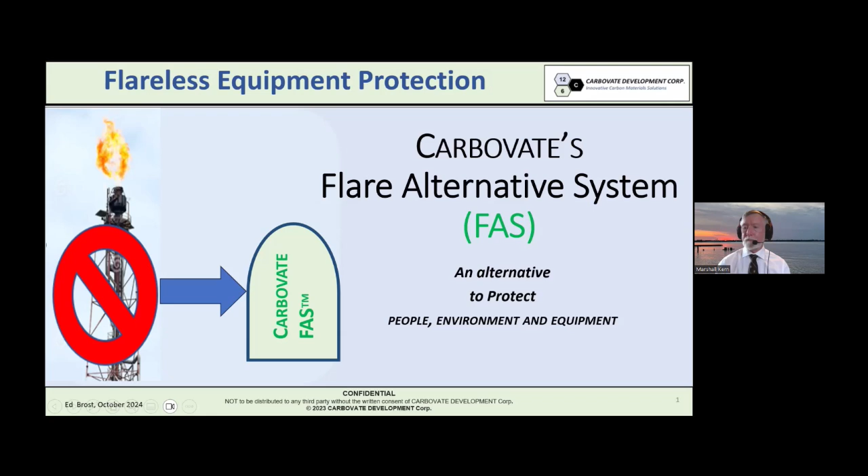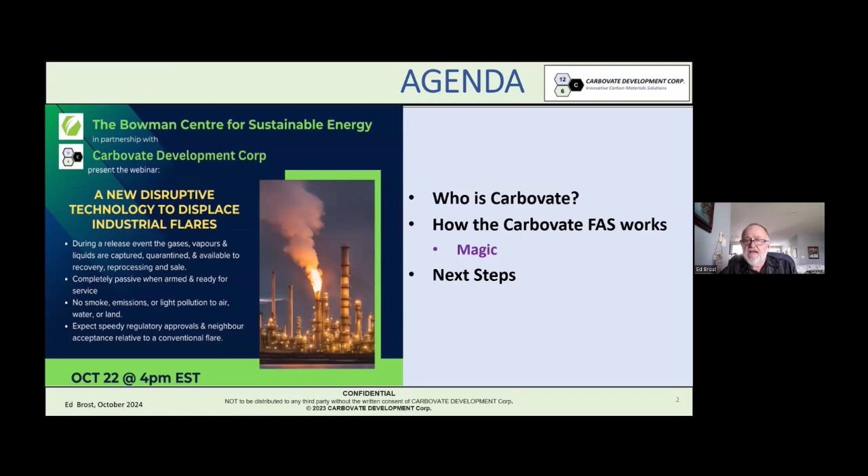So this afternoon, we're going to talk about what we call the Carbovate Flare Alternative System, or FAS. We were granted 3 patents on this earlier this year, which frees us up now to talk about how this system works. The system incorporates what might appear to be magic, so we're going to talk a little bit about magic today, and about our plans or strategy for commercializing this innovation.

But before that, I would like to introduce our audience to Carbovate. Carbovate Development Corporation was founded in 2018. We're a Sarnia-based company, with associates in Toronto, Quebec, and British Columbia. And like most corporations, we have a nice flowery mission statement, but it boils down to this.

What it really means is, what can you do with bitumen besides burn it? I'm referring here to Alberta oil sand, or Western Canadian oil sands bitumen. Most bitumen today that's produced or extracted is converted into fuel, and we burn it. The world's changing though, and as the world changes, we're looking for ways we could use this bitumen as a really valuable resource in ways that don't involve combustion. In other words, bitumen beyond combustion. To that end, Carbovate has been involved in carbon fiber research for the last couple of years, but we're also working on an even sexier product than carbon fiber, and that's asphalt.

As it turns out, asphalt or bitumen is, depending on the lease or the source, somewhere between 60 and up to as high as close to 80% asphalt. Now, today, that asphalt is primarily converted into fuel and burned, but this asphalt is actually some of the best asphalt in the world. And in trying to come up with a way to extract asphalt cheaper than it is today, we developed an entirely new process to extract asphalt from bitumen, and we were granted a patent for that process.

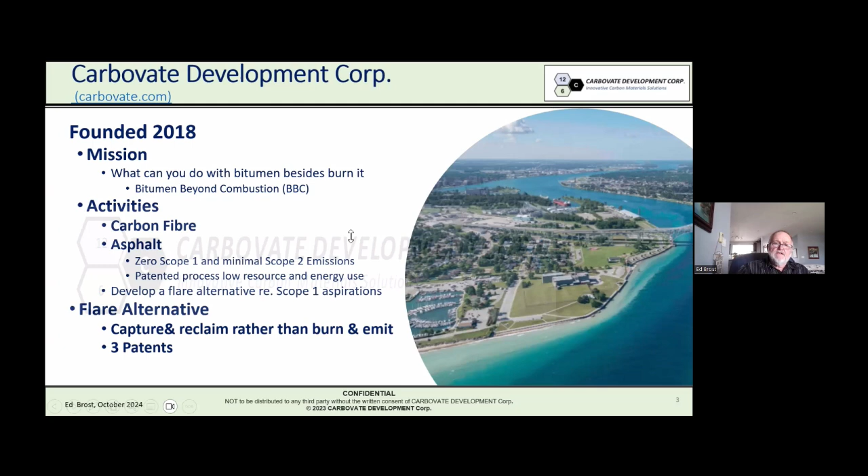And so we spent a lot of time, effort, and money developing a process that eliminates the need for a flare for our process. What the flare does in the event of emergency or maintenance, the process will capture and reclaim rather than burn and emit the material. So that's a bit of background about Carbovate and why it is we're before you today talking about an alternative to a flare.

Now, before we go much further, we need to be crystal clear. This is not a solution to all processes that need a flare for protection or safety. This process that I'm going to describe to you today is well suited for processes handling fluids with boiling points above, say, ambient temperature. And that includes solvents, gasoline, chemicals like benzene, toluene, xylene, alcohols, and so on. For that type of material, this system should work very, very well.

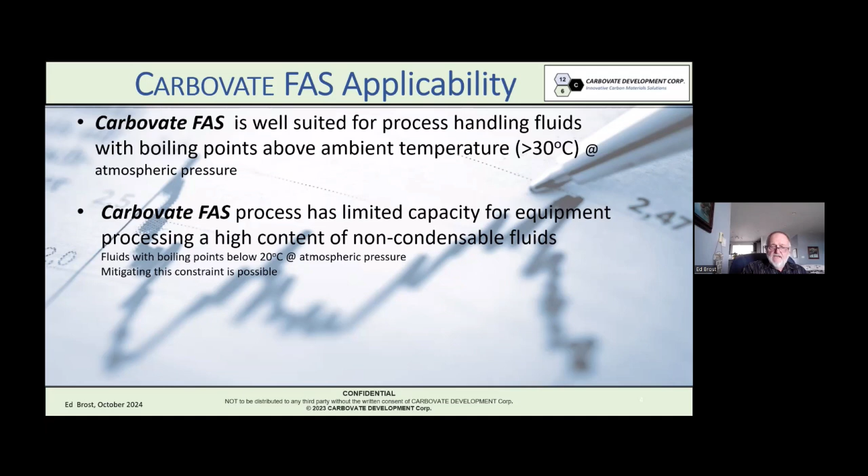It's not compatible, or wouldn't work very well at all, with processes that have a high inventory of gases, or what we call non-condensables. So materials that have boiling points, say, below 20 degrees C, which would include liquefied petroleum gas, propane, that sort of thing. Having said that, this process could work regardless of the inventory in the plant when it's operating, and could be used for maintenance or support services, even though the process might normally be processing a lot of hydrogen or methane or whatever.

So we'll talk a little bit more about this maintenance application later today.

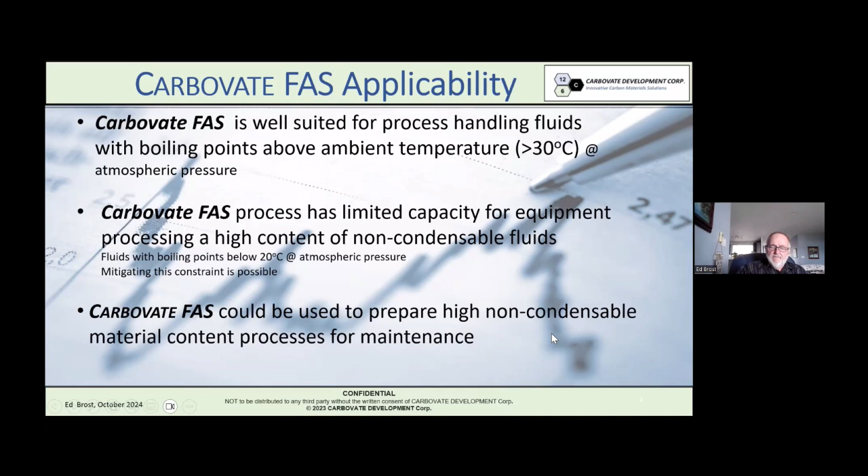So we are standing before you, talking about some claims about a flare alternative system. I want to highlight again that it's patented and could be a substitute for certain processes. It is completely passive—once it's in operation or in service, it requires nothing to operate. Pardon the double negative, it almost can't not work.

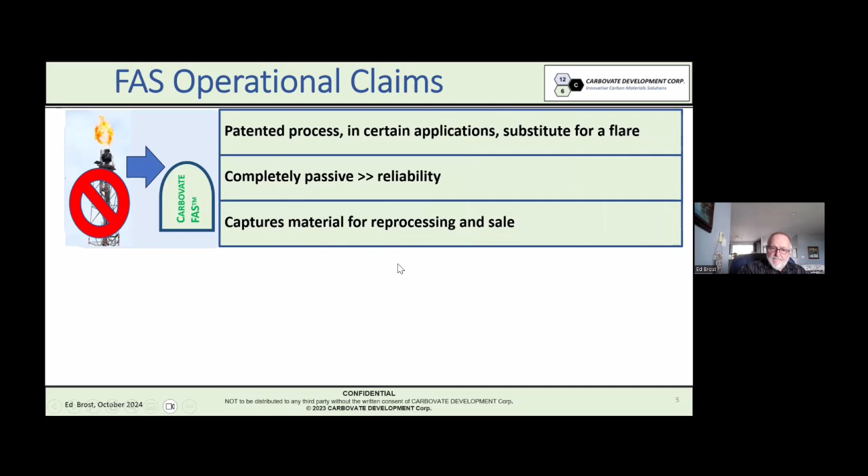As I said at the outset, it captures material for reprocessing and sale. The containment vessel is reduced—you might think you're going to need something the size of a hockey rink, but it won't, because of the chemical properties of the operating fluids, which I'm going to discuss in detail. This process, this Carbovate FAS, is really suitable for protecting a single process unit or perhaps several process units in a large facility, not likely for the entire facility.

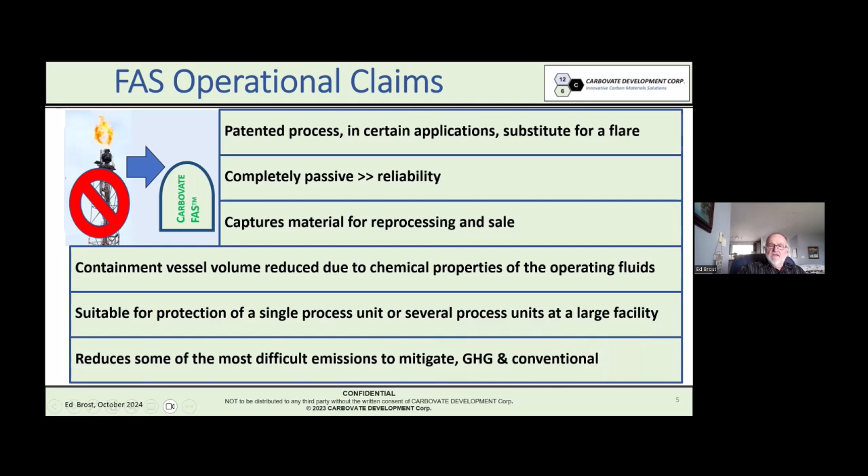And if your company is interested in managing GHGs, this is a solution for certain processes to mitigate GHG and conventional air pollutant emissions associated with a flare.

So with that, we are talking about substituting an inherently, critically important safety device called the flare. This is an extraordinary claim. And like Carl Sagan said, extraordinary claims require extraordinary evidence. And so...

Towards some of that evidence, we have hired a couple of independent engineering companies to build simulations for us. These companies are independent—they're not even in the same country. They have developed the simulations, and the simulations work. It shows that the thermodynamics, heat material balance, all of that—this actually works according to the models.

To that end, we were granted, as I mentioned earlier, three patents describing how this process works. We are working with the Patent Cooperation Treaty, PCT, and the PCT has taken an initial look at our claims and validated all of them. They say, first of all, they're credible. Nobody else is doing this. They are unique, and they told us that in their view, this idea has commercial application.

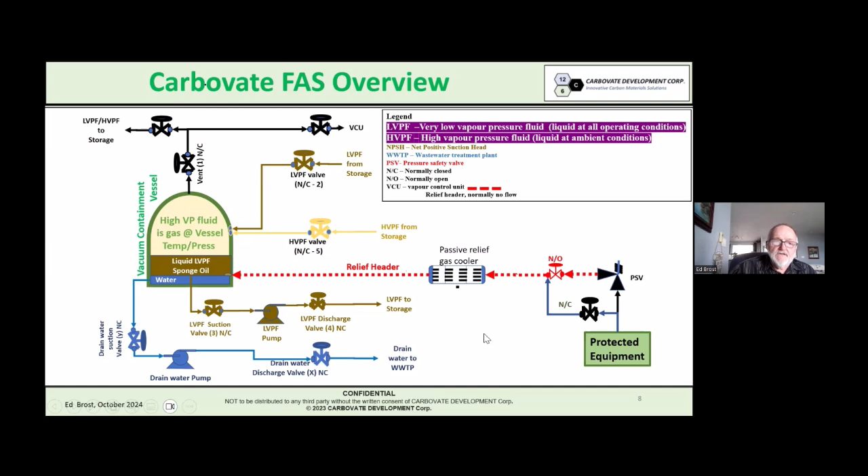We're going to simplify it and get down to how do we start it up. Here we have our brand new vessel delivered to your site on a truck. Of course, the vessel is steel and it's full of air. So what are we going to do about that? We don't want any air in our system. We're going to start and open some valves.

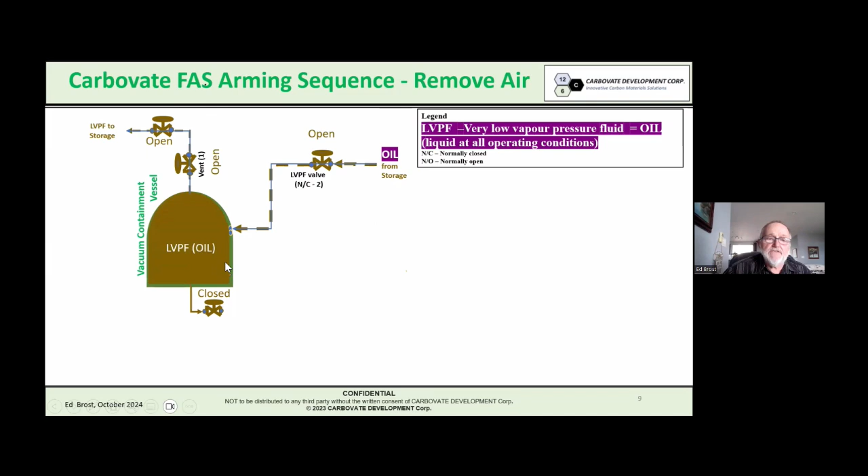And move some oil into the vessel, displacing all the air. So now we have a vessel with no air in it, and the excess oil has gone back to storage.

So now we want to create a vacuum. Now we could have used a vacuum pump and sucked the air out of the vessel, but it won't be a perfect vacuum, not like what we're going to have here. So instead of a vacuum pump, we're going to create our vacuum by using an oil pump, which is much more efficient than a compressor anyway.

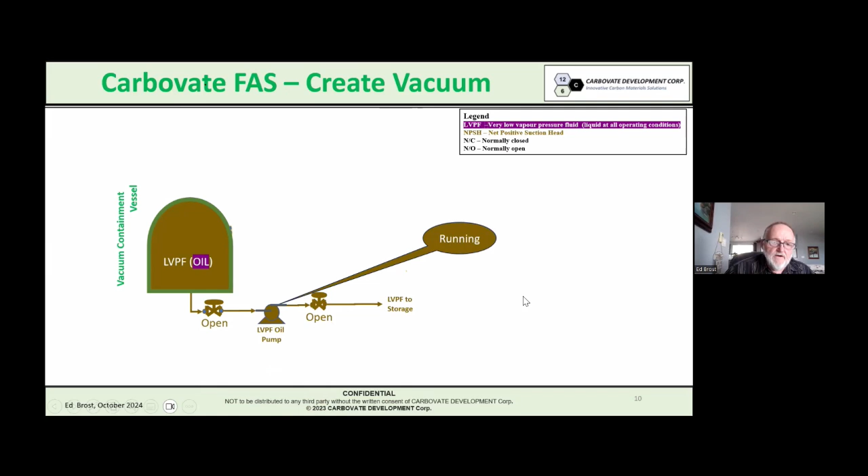And we start running our pump, but our pump's not going to run for very long. Why? Because this material has no vapor pressure to speak of. So we're going to end up with a bubble in the top of the vessel that is occupied by oil vapor, and it's going to be under a very deep vacuum. It's going to be equal to the vapor pressure of the oil at the temperature and pressure, which is ambient inside this vessel. That's good news so far because we have a deep vacuum.

And remember, in our busy cartoon, we had the protected equipment over here. So if something happened, the good news is it's going to flow very rapidly over here. The bad news is the bubble is so small, the vapor space is so tiny, it doesn't have much capacity to collect and capture relieved material. So what are we going to do about that?

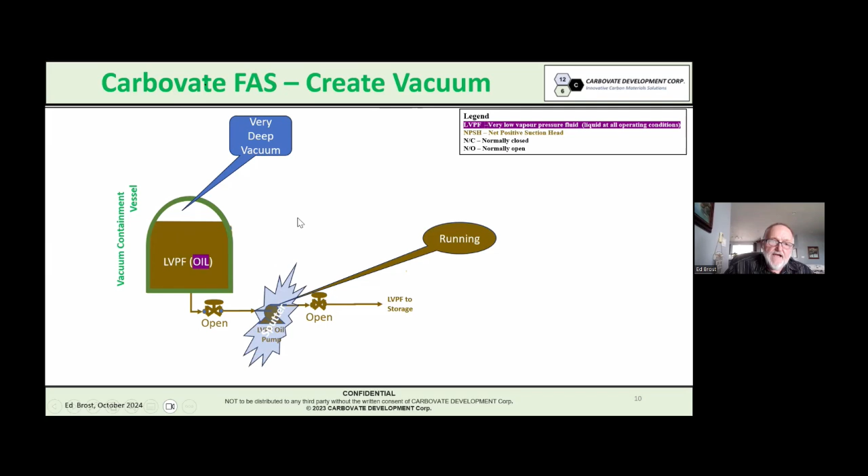Our pump, in fact, will stop running, it'll sputter, it'll cavitate. So what are we going to do? We're going to inject our naphtha, our high vapor pressure fluid, into this same space.

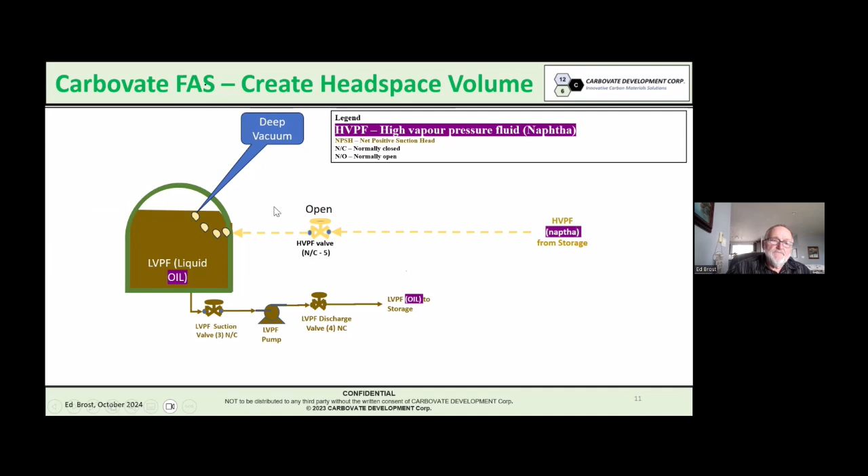So we open our valve, the naphtha flows in, but guess what? Under the conditions in here, this material is way above its boiling point at 20 degrees C. So it immediately flashes into a gas and evaporates. And that means it increases the pressure a little bit, allowing our pump to start again.

So now we can pull more oil out and add more naphtha. And while this is happening, the pressure is staying under vacuum. It's still staying under vacuum.

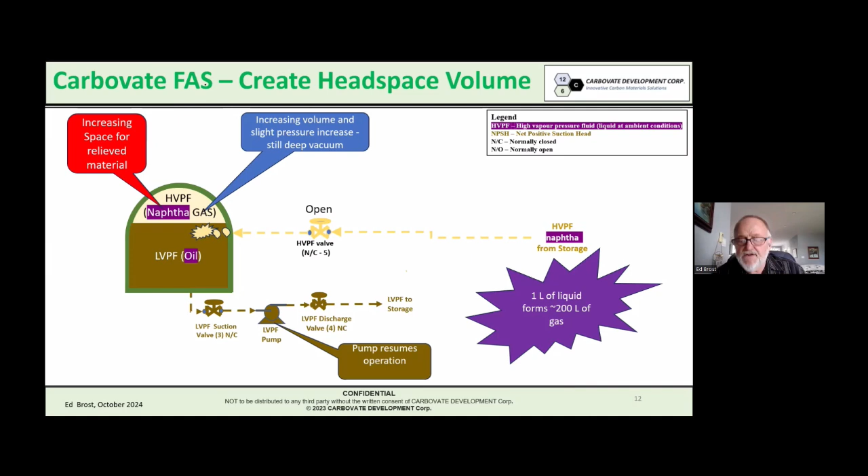Now, there's one last physical property of these fluids we all need to be clear on. When you evaporate a liquid into a vapor, the vapor occupies far more space than does the liquid it came from. In the case of light hydrocarbons, like we're talking about, notionally, 1 liter of liquid will form about 200 liters of gas vapor. The exact volume depends on a bunch of variables like temperature and pressure and other factors, but notionally, it's far more volume involved. In the case of my discussion here, saying 200 liters of gas will come from 1 liter of liquid.

So when we get to the armed state or ready state, we'll have our vessel full of naphtha vapor, a tiny infinitesimal amount of oil vapor in here because it doesn't have any vapor pressure. The system is under a vacuum, and we now have physically an apparent volume that's much more significant in the context of being able to collect relieved material. So far, so good.

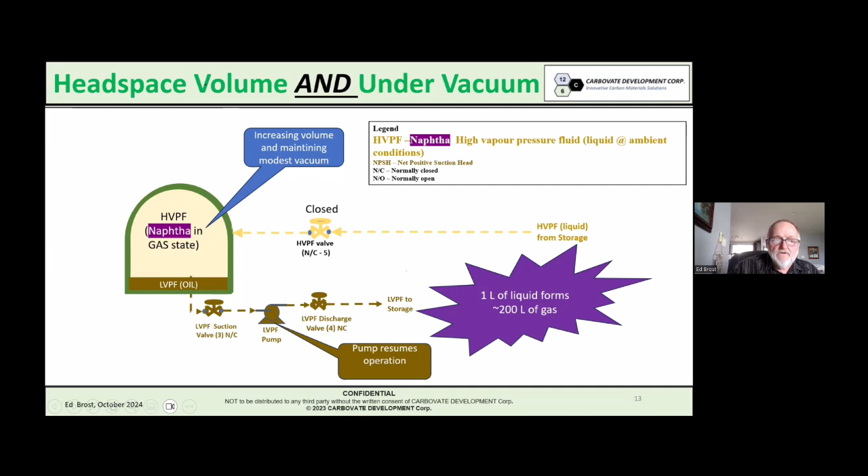So back to our busy cartoon. We have our protected equipment. We have our vessel here with the naphtha and oil in it, and that is called, we refer to that as the armed state. The system can now be disconnected from all of these connections because it doesn't need anything else now to operate.

And this is where something that might appear like magic happens, because as Arthur C. Clarke said, any sufficiently advanced technology is indistinguishable from magic. And you might have noticed that some of the color cartoons and highlighting were in purple. That's the magic part.

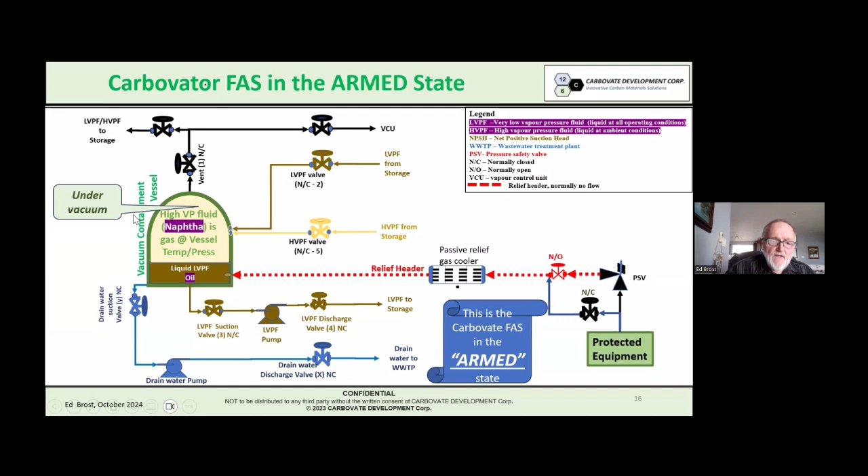So here we are. We're under vacuum. Let's focus in on this part of the system now and get rid of all the other lines. And what we have is our protected equipment. We have our vacuum vessel or our containment vessel in the armed state. And we have a pressure or relief header analogous to a flare.

Now, normally in a conventional system, this relief valve would be connected to your flare. Here, it's connected to the containment vessel instead. The pressure safety valve, if it is here, and if the pressure in our vessel, for whatever reason, exceeds a target number, the valve will open and go either to flare or in this case to our containment vessel.

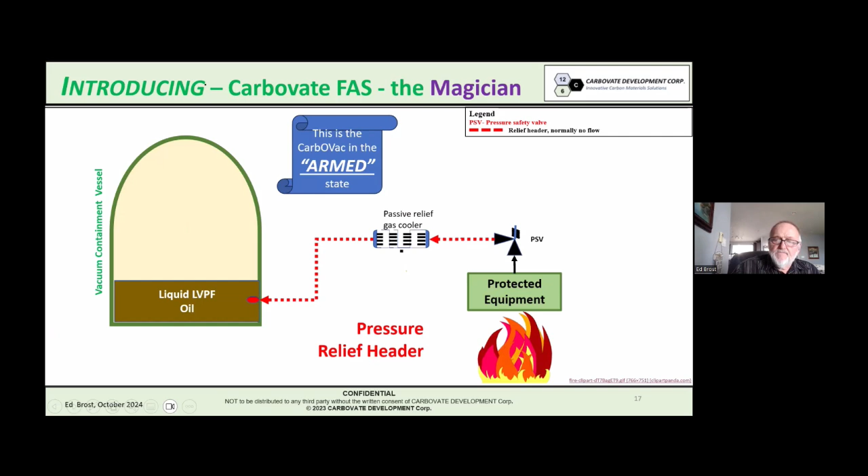So we have some kind of an event happened. The pressure starts to increase. It gets to an unacceptable level. The relief valve opens. The overpressure material then flows toward an optional cooler.

It's not necessary, depending on the process. We may or may not need that, but this is a passive cooler in that it is just a bunch of tubes with fins on it. So it's an aerial cooler, but with no fan or anything like that.

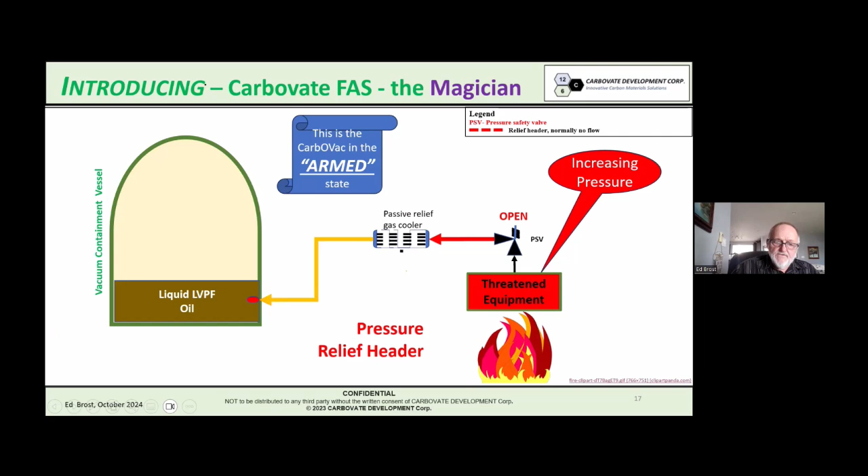The cool material then flows in here, and this is where the magic happens. Remember, I said 200 liters of gas forms 1 liter of liquid. Well, as this material goes in here, guess what happens?

The pressure starts to rise. This was at equilibrium before the valve opened. And so what's going to happen is some of this naphtha is going to start to condense.

And as that happens, for every liter of naphtha that condenses, it frees up 200 additional liters of space to accept material from our threatened equipment.

And so if you can envision this, before the relief valve opens, everything's in equilibrium, it's nice clear blue sky, or whatever color, yellow sky inside the vessel. Once this opens up, it'll get very foggy, and then suddenly it'll start raining naphtha inside the vessel.

And so although the vessel is steel, it's not a balloon, the tendency here is for not only the volume, but also the pressure to be sustained. The volume will go up, especially because the liquid's rising, and the pressure will also rise slightly, but there is a very strong tendency for the pressure and the volume to be retained, even though there's more material flowing in here.

So we have more kilograms in here, but like magic, everything seems to be staying the way it was prior to the event.

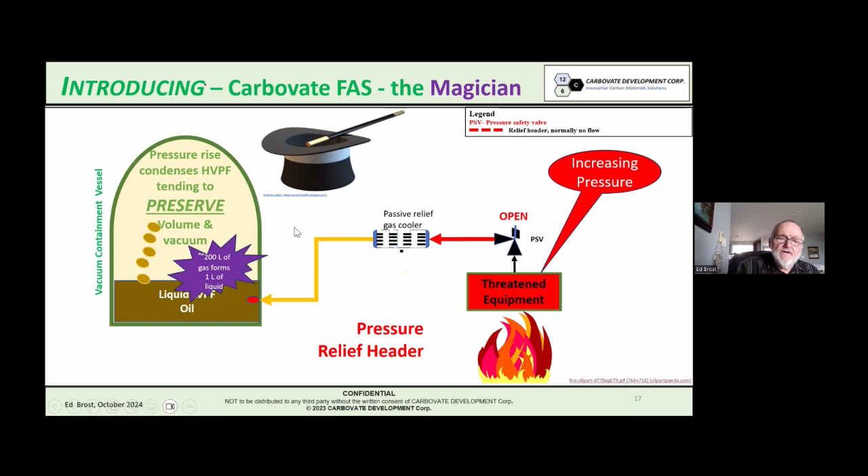So now the event is over. The pressure has been restored. The fire is out, or whatever was causing the disturbance. The relief valve closed, flow was suspended, and here we have nothing went to a flare.

Nothing was released. Everything is now contained inside our vessel. It's sequestered, and so we are now going to recover that material.

This gets really easy because we're going to do the same thing we did when we commissioned it in the first place. All we're going to do is open our valve here and send oil into the vessel and fill it up, displacing everything that was in the vessel, including all the material that was captured from our threatened equipment. And it can go back to storage and eventually for reprocessing and sale.

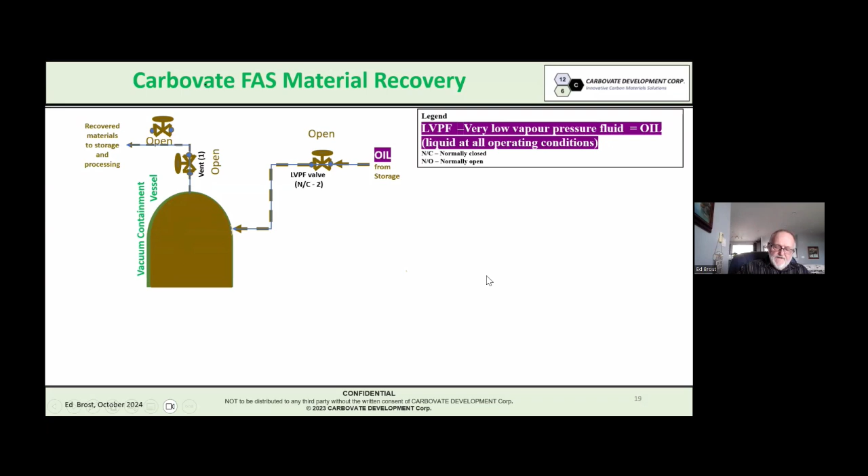So what I've described for you is referred to as a passive self-regulating process. This thing doesn't need any electricity to operate once it's armed and in service in its role as guarding this equipment, the protected equipment.

It doesn't need electricity. It doesn't need steam. It doesn't need fuel. It doesn't need anything. It doesn't even need an operator. This thing, all that has to happen is this relief valve. If the pressure gets high, all it has to do is open. Everything else is automatic. And so it is completely passive in its operation.

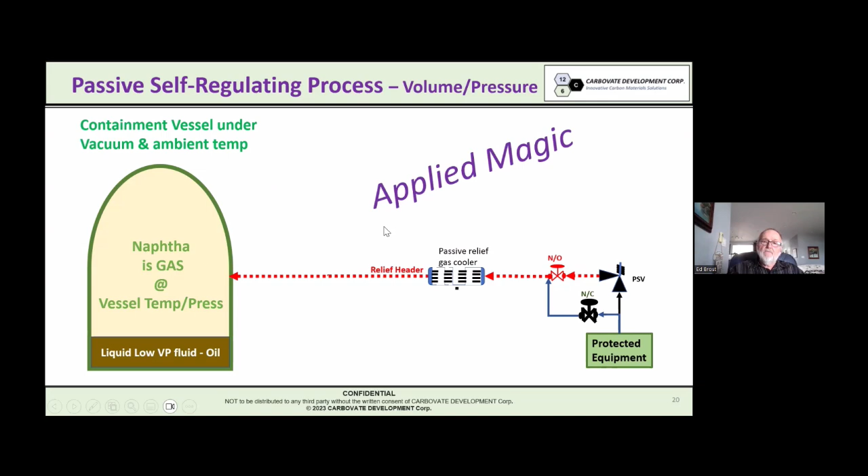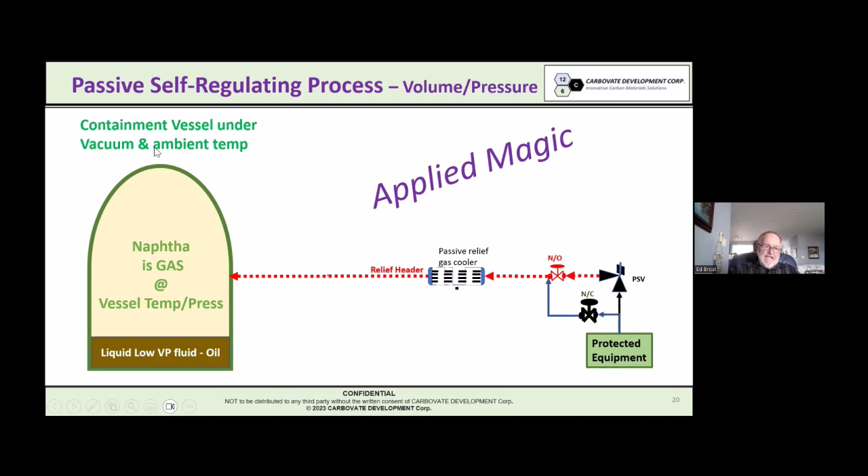And so this applied magic, we went to a lot of trouble around this to figure out how this could all work. And there's a reason for that. You could have a system like this without the applied magic, but the vessel will be huge. The purpose of this combination of fluids is to reduce the physical size of this vessel. It doesn't need to be very big at all compared to a vessel that was just depending on its physical, mechanical volume as defined by the vessel itself.

One other thing we've done towards getting across this valley of death is we've had an external engineering company physically design a plant, of FAS to support our asphalt plant. And so what we have is process flow diagrams, P&IDs for the entire facility, the sizes of the vessels, the supply and control P&IDs, auxiliary equipment, it's all there, giving us an opportunity to get a capital cost for this thing. So we also have, in the interest of commercialization, some notion of what a system like this would cost.

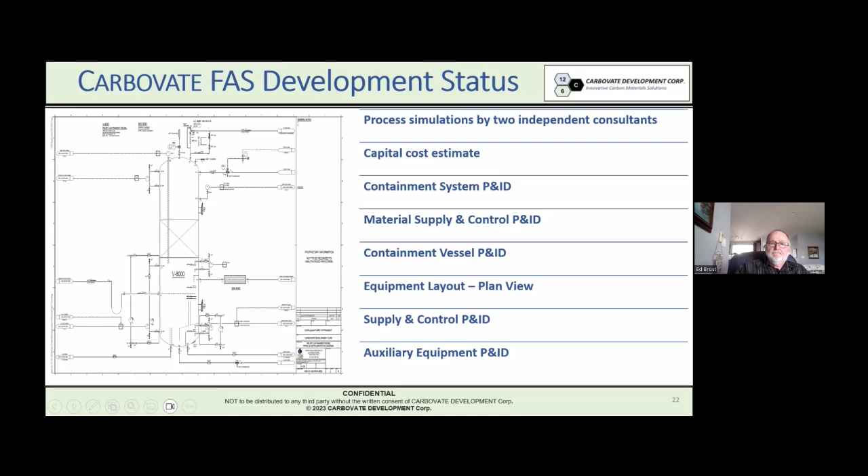Now, this is a very difficult technology to try to demonstrate because of the role a flare plays in a plant. It is primarily and fundamentally a safety device, there to protect against overpressure circumstances, and you shouldn't put a prototype in that kind of service without a flare until it's proven physically. And so that is what we're trying to do, trying to get across this Valley of Death.

Now, we have a strategy to try to de-risk this physical demonstration of the technology, and that is around planned maintenance. Because although a flare's primary objective involves safety, flares are also used as part of planned maintenance. Under completely controlled conditions, material is relieved to a flare, and we think that would be one of the first steps, actually the second step, in getting across the Valley of Death.

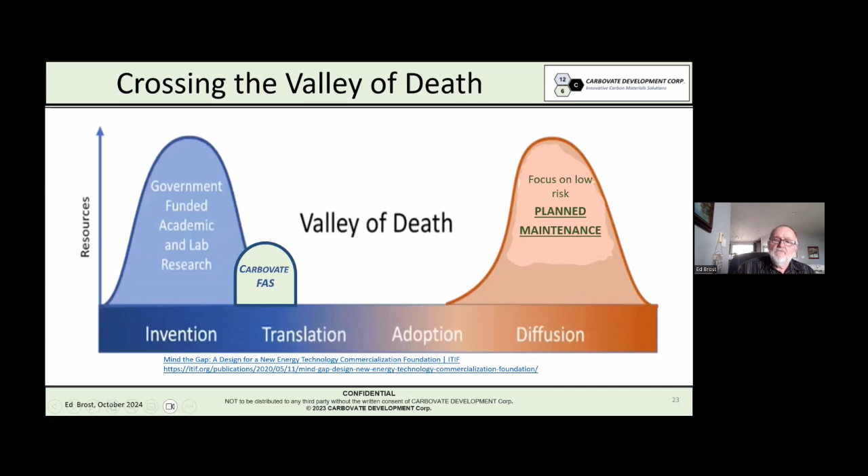So how would that look? Well, in any ordinary petrochemical facility being shut down so people can go into the vessels and inspect them and do maintenance repairs, the first thing to do is get all of the hazardous material out of the vessel. That's done using blowers, pumps, compressors, whatever, to evacuate or de-inventory the equipment. That method only can go so far. There will still be residual vapors and gases and pockets of material or sludge inside the vessel, and it's not safe to open.

So the practice is, as I showed in an earlier slide, there is a bypass around this relief valve. With the valve closed, you can open this bypass valve. Normally this would go to a flare—you'd steam the equipment out to a flare until the safety department says it's safe to open. In this case, what we're going to do is put steam in it exactly the same way, with no undue risk, and it goes through our bypass, through our cooler.

Into our vessel. Now, water is a high vapor pressure fluid compared to the oil, so the water is going to behave in there just like the naphtha does. As the water flows in and the pressure starts to rise, it'll begin raining naphtha inside the vessel, just as it would in an emergency scenario. But also, this water is going to condense, sustaining the temperature and pressure in the vessel. You can do that until the equipment is determined by the safety department to be safe to open and enter. So that's how you could use this equipment in a maintenance support role.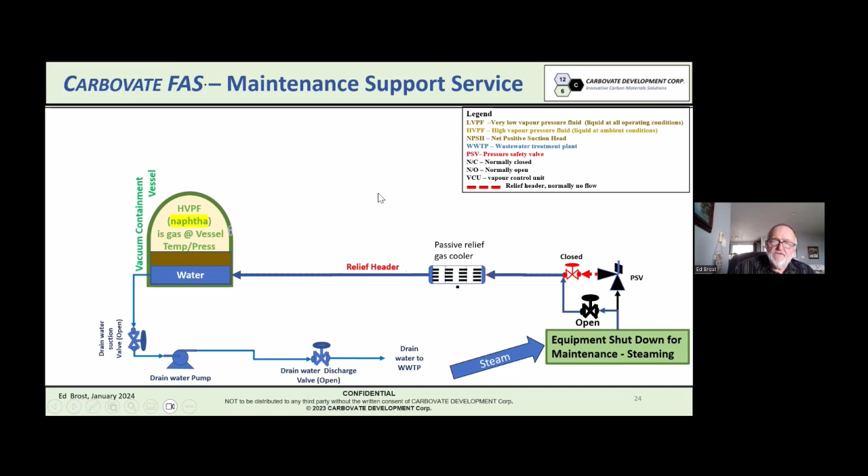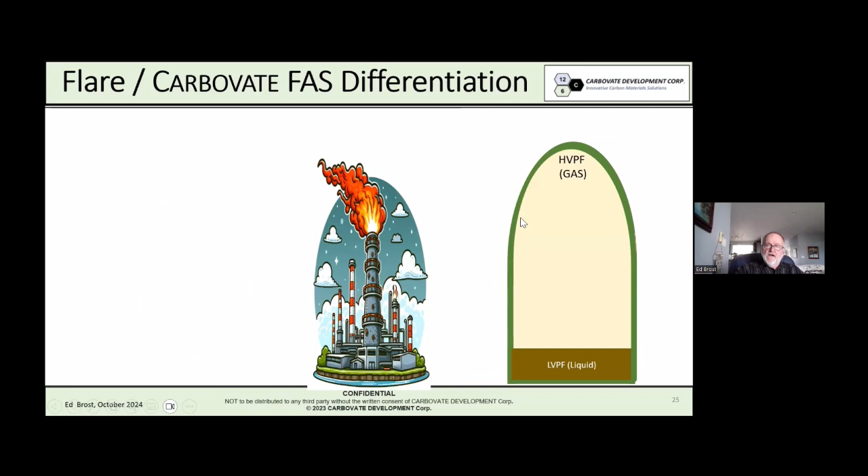Before we go further, I've been talking a lot about flares and the difference between them. So I'd like to differentiate on one page what we're talking about in terms of advantages and disadvantages. If you're interested in GHG emissions, the flare, which was a complete obstacle for us until we came up with this idea around getting to scope 0, scope 1, or scope facility emissions for our plant—the flare, especially if it has a pilot, is going to have GHG emissions chronically all the time.

That's not the case here. In the case of an emergency relief, or even a planned maintenance release, again, more CO2 on top of the chronic—this is an acute event. That doesn't apply here. Flares are not a particularly good combustion source.

They're not really good at it. A furnace is much better at burning the fuel than a flare is. So you end up sometimes with smoke. You end up with SO2, NOx, particulates, VOCs, all kinds of other things coming out of this flare. Again, not an issue with our system here.

Flares, unlike this system which is very simple, look like a simple candle, a big monstrous candlestick, but in fact, to make them reliable—and they are very reliable—there is a lot of equipment involved in maintaining that reliability: pilot flames, igniters, monitoring equipment, a flame front generator if the igniter doesn't work. None of that is required for this.

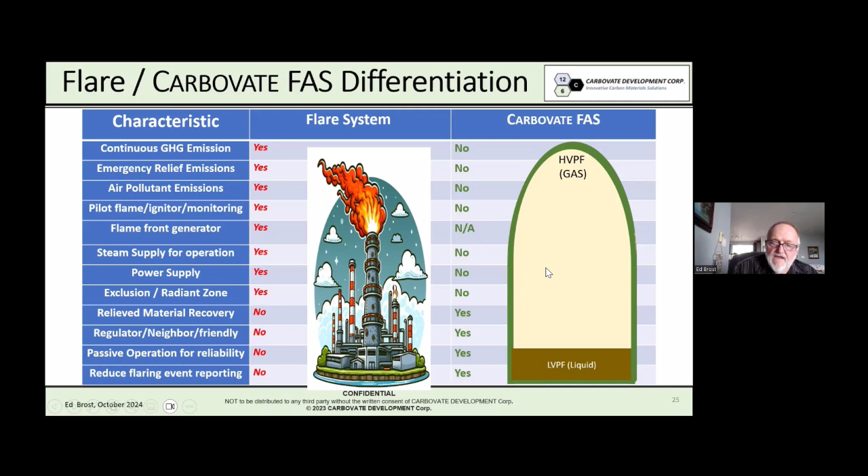There are also applications in the chemicals and beverages sectors—in beverages, this will work perfectly in a distillery. Water could be one of the fluids, as well as ethanol, and alcohol plants like methanol, ethanol, and propanol. There's all kinds of industries in the chemical sector this technology could serve.

One of our consultants has connections to the pharmaceutical industry, and he's told us he thinks there are a lot of applications in the pharmaceutical sector for this type of work. If you ask me about pharmaceuticals, I'll just tell you our consultant said so, because I really don't know—I can't make any more comments on that one.

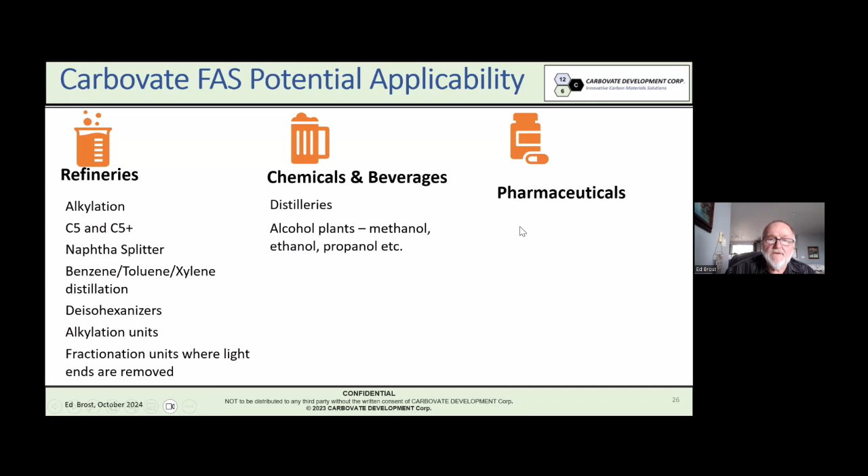So in summary, Carbovate is offering an alternative to a flare system. If you're concerned about GHG emissions, this could represent a path to mitigate one of the more challenging GHG emissions in facilities served by a flare. If you're in a facility where the flare is limiting expansion or a new process unit, and the economics include debottlenecking or building a new flare, this offers a way around that.

Even if the grand idea involves gases or non-condensables, what you could do is apply the Carbovate FAS to some other facility in the plant where it is suitable, which would free up capacity on your flare system.

Because there are no emissions, no noise, no light, none of that, we think this technology would be seen by stakeholders in the community as a friendly approach. And if that turned out to be true, there's potential for fast-tracked regulatory approvals.

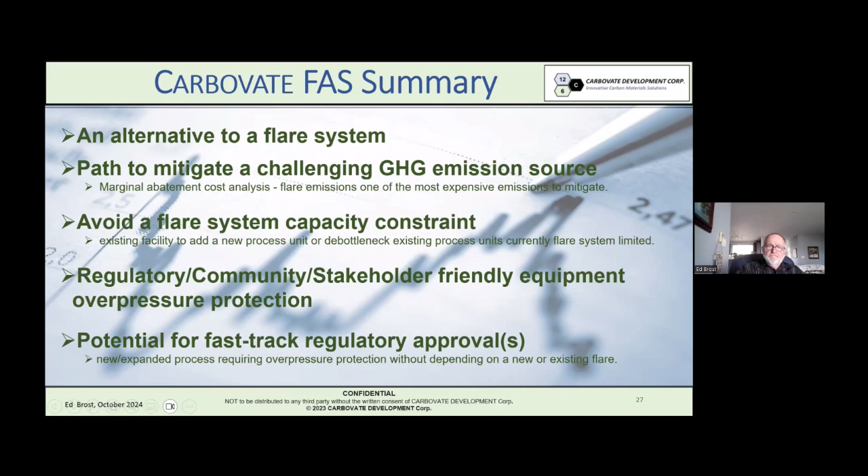So, next steps: we are looking to partner with others to build a lab or pilot scale unit to demonstrate the concept in a tangible way. It's already been demonstrated with models, but not yet physically. We have reasonably good plans on how that lab test would work and what it would look like.

Once that's proven to work, the next step would be to build a commercial demonstration unit. I think it would probably be sized to fit on a trailer, maybe two trailers or a truck—think of a vacuum truck.

Then you could go to a whole variety of different industries and try it out as part of their maintenance operations and shutdown operations. Doing that, we would test a variety of potential applications without presenting any undue risk to anybody.

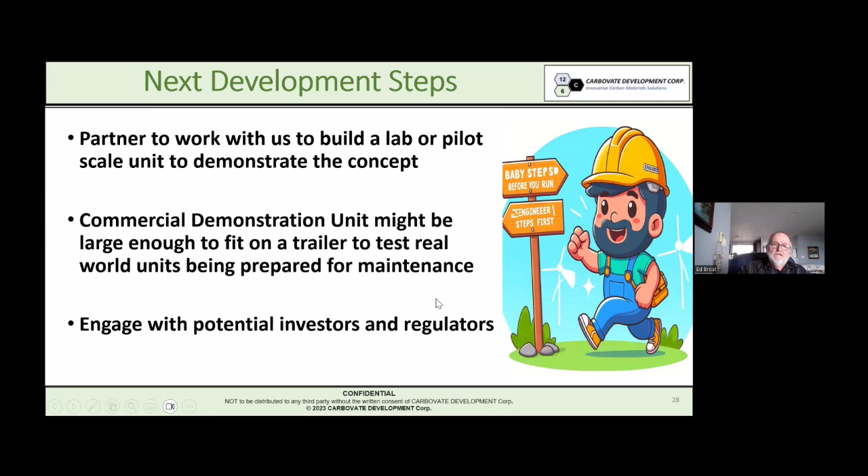To that end, we are engaging with potential investors and regulators to help us with our journey across the valley of death. The type of people we're looking for are likely multinational corporations with connections to the oil and gas and petrochemical sectors. So with that, I'd be glad to entertain some questions.

Am I talking? Hello? Hello? Ah, there you are, hi Marilyn. Dawn, can you unmute Marilyn? Dawn Greaves.

I'm never surprised when they don't want to unmute the politicians, but excellent presentation, super interesting idea.

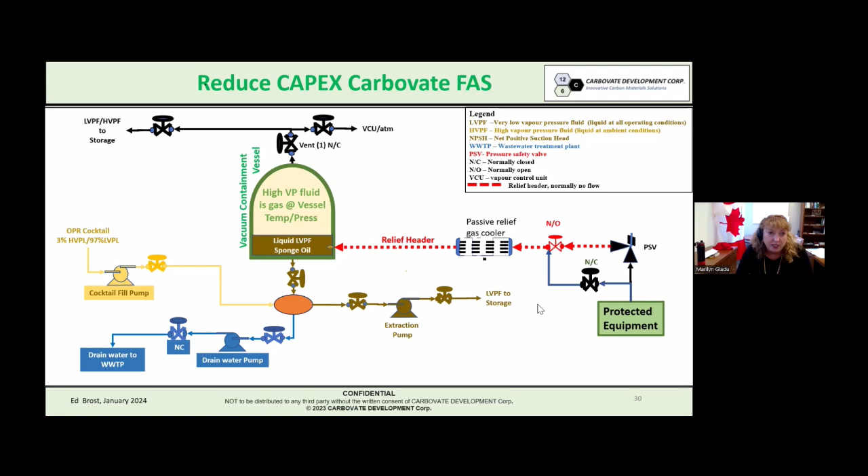One of the challenges I see is that flare events have a huge range—sometimes it's a little, sometimes it's a whole lot more than you think. You've got a small vessel for economic cost. How are you taking care of valve sizing in and out to ensure that in a super rapid event, you can bring all the gas in and let the oil out while still being responsive in a smaller event?

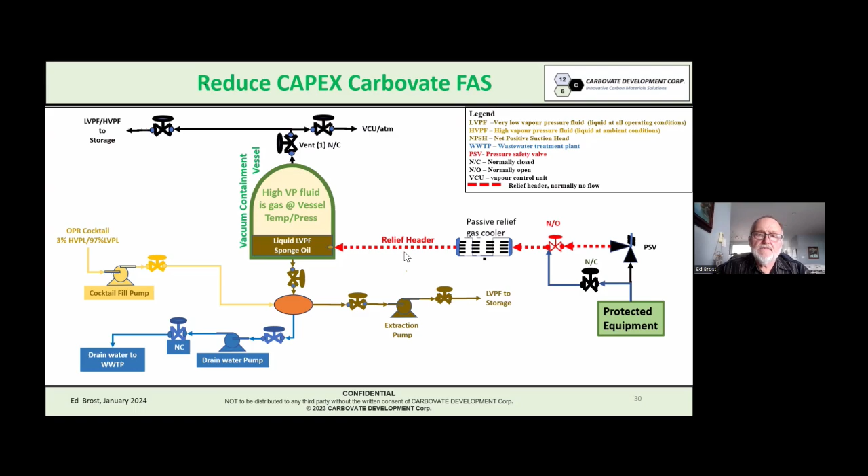That's a really good question, Marilyn. At the outset, I mentioned that this would be suitable for a single unit. So we don't think you would take a whole refinery and try to bulldoze the flare and replace it with a vessel like this. No, what you would do is bolt it to the BTX splitter or fractionator, so it'd be connected to one unit.

Your question, I think, also included how do you come up with the line sizing over to the vessel? Well, that would be the same as you do with a flare. You're going to have a header, and a smart mechanical engineer with fluid mechanics expertise—excludes me, but I think would not have any problem with that—because we have quite a pressure differential here. The vessel is under vacuum, whereas a flare header might be operating at 10 psi or something, marginally above atmospheric pressure to ensure you don't get air in it. Here we have more motive force because we have it under vacuum.

So I don't know if that answers your question. I think though, thank you. A key point though is we're not thinking that at this point this thing is ready, or likely ever be appropriate, to take down the whole flare. It's going to be for one unit. Now in a refinery, you might have an alkyl unit, a deisohexanizer, and a BTX distillation column—that would be three of them, one in each unit.

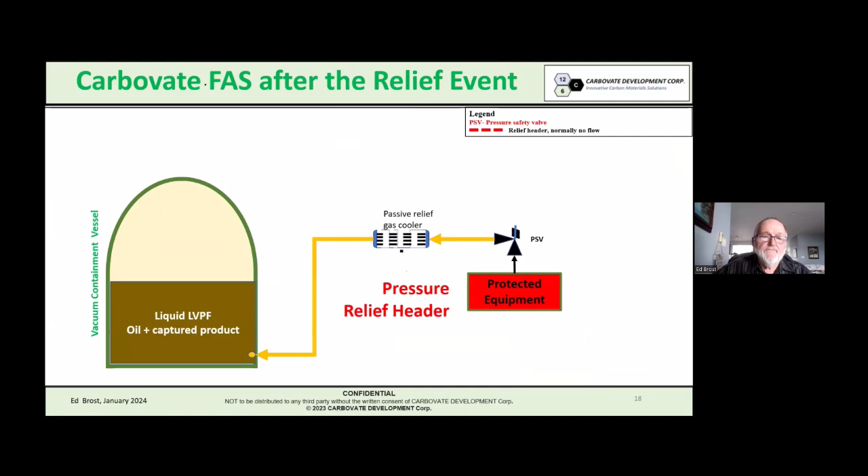If you go back to your flow diagram—I would call it a pretty complicated flow diagram—does it necessarily have to be that complicated? No, the diagram is that complicated. Could you go to the diagram? Could you take it up? There we go. Yeah, there we go.

So this diagram is that complicated so that I could take these lines apart and show you how it works, to enable easy explanation. But in fact, if as a chemical engineer you know the pressure in here that you want to get, and you know the temperature because it's ambient, then you could come up with a cocktail of fluid already at the right mixture, so that you could eliminate this line here—this line could all be one line, eliminating all these valves, and only have one pump. It could include this one down here—this could all be part of the same system.

If you had a cocktail—I'll make up the number for illustration—say 10% naphtha and 90% oil, and if you stick that in there, by definition, through just physical chemistry, you're going to end up with the right amount of oil at the bottom, the right vapor pressure, the right amount of headspace in the vapor space, and the target volume, because those conditions are actually defined by the composition of the mixture. So thanks for the question.

Yeah, this could be a lot simpler, but I needed it because I wanted to be able to take the different parts of the drawing out to show you how each piece works. It would have been much more difficult for me to explain how this works if I used this cocktail approach to try to explain how it works.

Thanks, Don, for that.